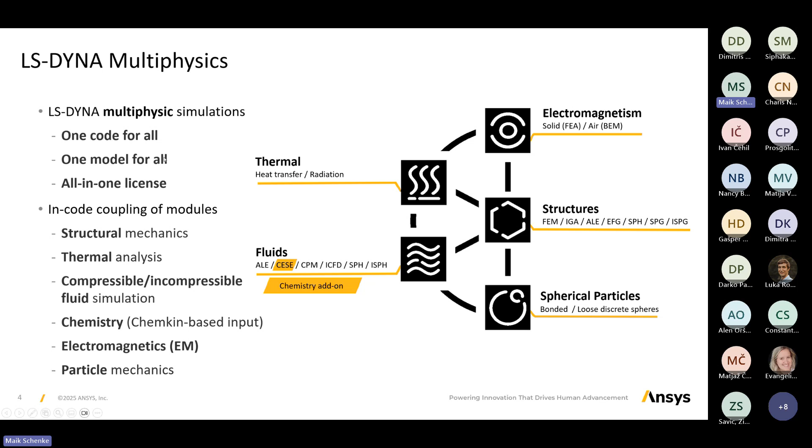Usually when you develop a new product, you have to consider a couple of load cases. For instance, take this ball pen as an idea: you have to think about the operating conditions. You activate the pen, deactivate the pen, do it 1,000 times, and then simulate this to get an idea if your design actually works and how good the reliability is.

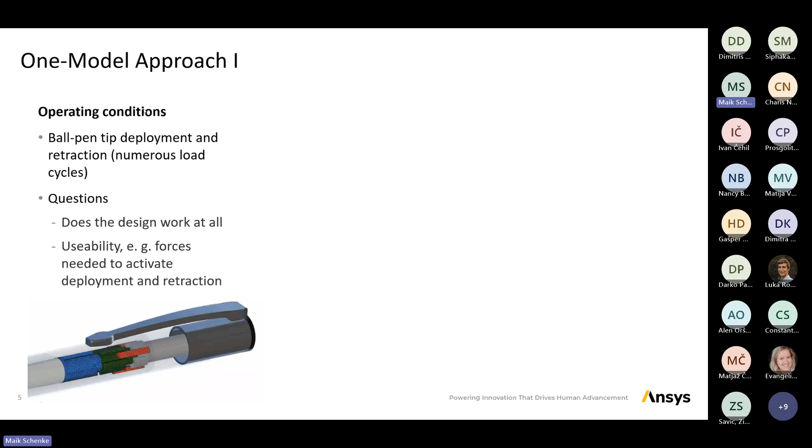But apart from these operating conditions, you also have different load cases, usually called misuse load cases. For instance, with a pen, some people get angry and try to release the pressure on it, so they start to bend it — that's a misuse load case. Or another one: people get angry in a different way and just throw the pen against the wall. That's the second load case.

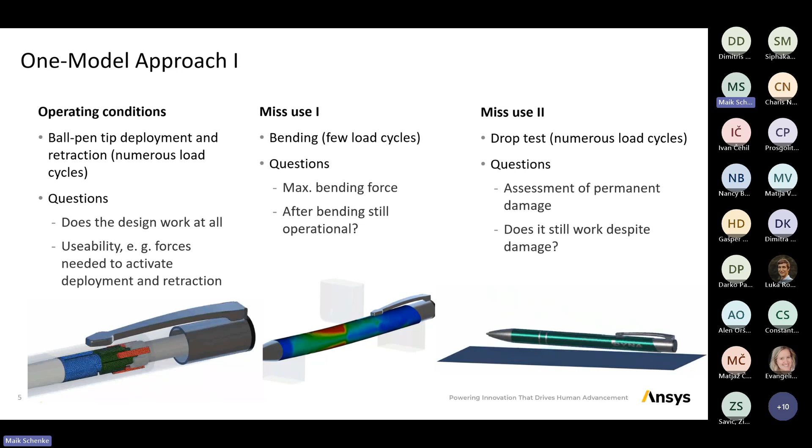What you need to do when you design an object is consider all these different loading conditions. The problem is, depending on the scenario you want to simulate, you have to rely on different methods. For instance, this one here could be an implicit load case, so it's something slow and static. The drop test, though, is something more fast, quick, and impact-like. But you have to bring it all together, and what people usually do is start with their geometry.

You create a simulation model, define your operation loading condition, then take the CAD geometry. Maybe you can reuse some of the meshes, but most of the time you have to convert it again to match your software, then run it with a different software, and so on. So for one product, you often have to incorporate different software tools to simulate different loading scenarios.

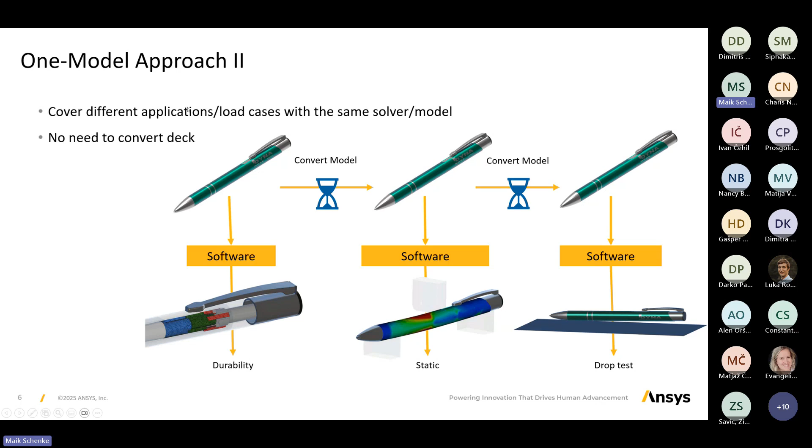So what is the one model strategy? Basically, you do everything, in this case, with LS-DYNA. For instance, you can run explicit and implicit models in the same solver, so there's nothing you need to switch. There's a switch in LS-DYNA you have to activate, and then you can run an implicit simulation with a model which originally comes from an explicit design, or vice versa.

I want to be honest here. Some features have to be remodeled, but basically you're saving a lot of time because you do not start from scratch all the time. You can save a lot of time because the element types, loading conditions, everything is reused, and you're saving a lot of time by doing this.

And then, of course, you can also think about putting this into a multiphysics simulation. Again, you're staying inside of the same code, which actually helps you save a lot of time.

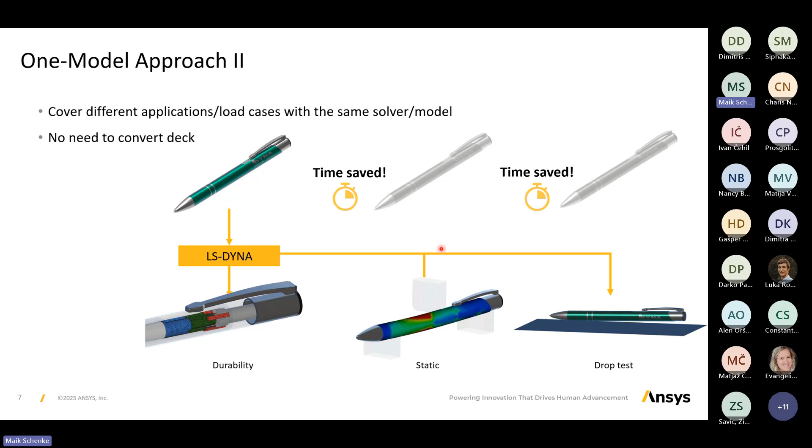This is the idea, because I want to get this straight, as a lot of people didn't know what was meant by this one model approach. When you come across this term, one model approach is the idea of doing everything in LS-DYNA, if possible. If you have crash scenarios, most people do their crash modeling and then also investigate whether they can do implicit or quasi-static load cases as well. If this is possible, they're saving a lot of time.

Let's jump into the first section, which is vehicle design. Here I'm going to focus on land combat vehicles. When you think about these vehicles, this is just a generic military design. You have, again, different loading scenarios to consider.

For instance, there's this mine blast. You have to think about what happens to your structure if you expose it to a shock wave or a particle blast.

Then, of course, you need to think about NVH, about rough driving. Then there's the impact onto the structure, in terms of how that impact affects your passengers inside. This is also something to consider.

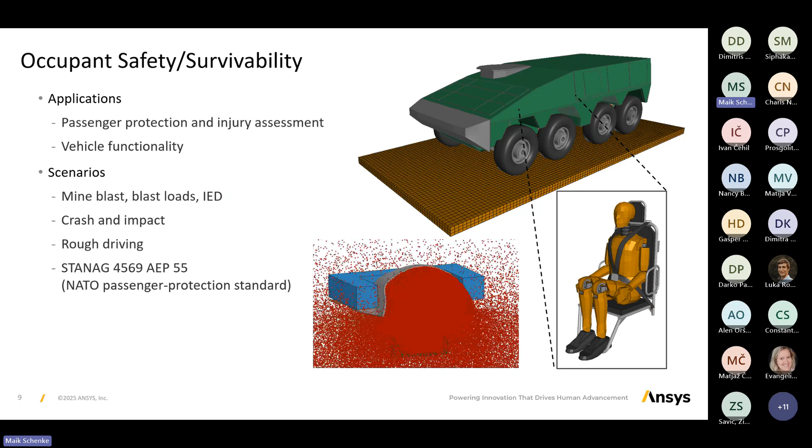And then, of course, you have to consider all kinds of NATO protocols for safety standards and so on. What I want to say is there are so many different types of loading conditions and scenarios you have to consider and bring together into one product, and in the best case you can do this in one software, which saves you a lot of time. But this is the best case scenario, and of course there's still some modeling you cannot do with LS-DYNA. Still, before you switch to a different code, ask: can this be done in LS-DYNA as well?

So let's talk about blast modeling. This is one of the load cases when you think about vehicles. There are several methods available: you can use ALE, you can use CPM, or you can also use the dual CESE method if you want. The idea in any case is you have a source of a pressure wave, and it's affecting the structure. If the pressure wave is strong enough, it can even lift heavily armored military vehicles. There are different ways of doing this.

For instance, here this is just the ALE method, which is one way of doing it. You can also use the CPM method together with particle methods, in order to enhance the blast acting onto the structure. That's one way of doing this.

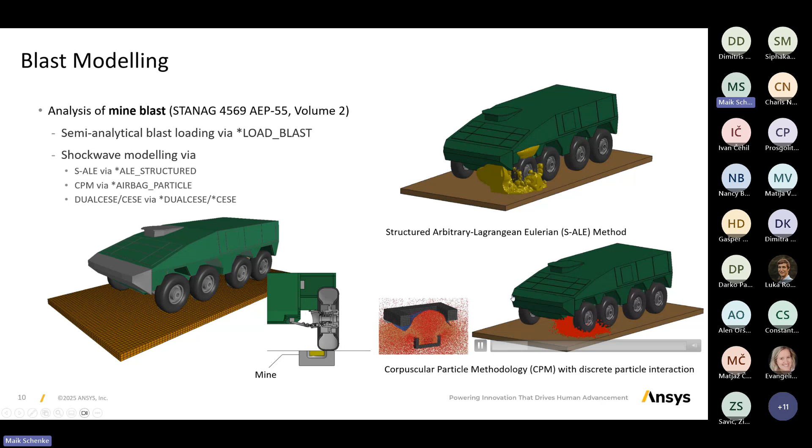The next step is to look inside of the model to see what the blast is actually doing to the car. You can also check for penetration.

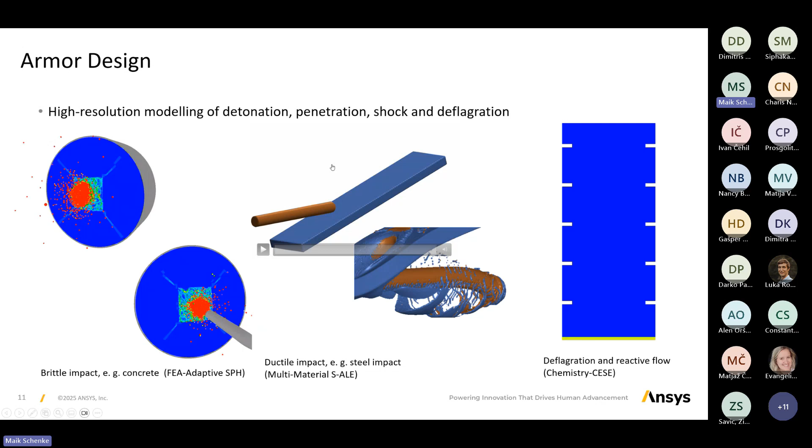Another one would be the ductile impact. This is the classic scenario where you have high velocities, and even though it looks like liquids, these are of course not liquids. These are solid materials, but just because of the high impact you have these large deformations, making the solids look more like liquid-like materials. Here, this is done with the ALE method.

Then we also have something we call the CESE method, which is actually flow mechanics for high velocity flows. So for instance, pressure waves, hypervelocity impacts, hypervelocity flow, like in engines, rockets, and these kinds of things.

We even have this reactive flow. This is a simulation my colleagues did a while ago, showing the burning process inside of a tank. They wanted to understand the pressure distribution, the propagation, and also wave reflections.

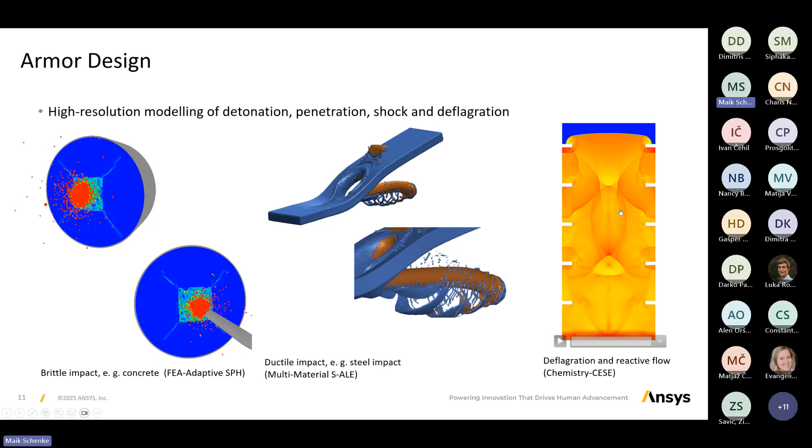So to sum this up: here we have our design with brittle fracture, which you can handle with FEA and SPH. You can do ductile impacts, where I think the S-ALE method is the way to go, or if you have hypervelocity fluid flow, and this can also interact with a structure. You can place a tank in this scenario or some flexible structure, and it's always interacting with the fluid flow.

Next up, we go into the vehicle, which is then occupant safety. I'm not sure if you heard about it, but maybe a year or two ago we released this new high fidelity human body model, developed from Dynamore, and now part of Ansys. The idea was to go all in with the details of human anatomy, making no compromises, and including as much detail as possible.

For instance, we took all the muscles and did not simplify them in any way. You won't find any line elements representing muscles, ligaments, or tendons. It's all modeled as solid elements or at least shell elements, to have the most high fidelity human body model and keep it as general as possible, so we don't restrict further applications with early simplifications.

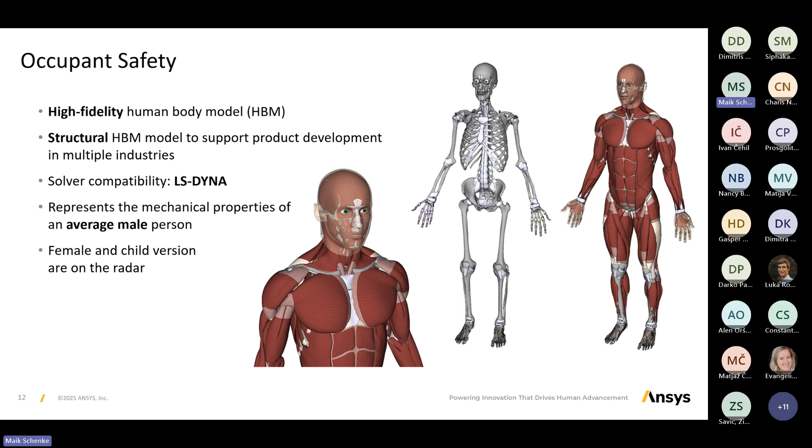And this is the outcome, the HANS model. Currently it's heavily focused on automotive industry, but we're already investigating applications for military use. For instance, here you can see the first tests with a blunt impact at 35 kilometers per hour, which is the typical scenario for automotive.

Also here, a belt tension scenario. But you can also think about military applications — for instance, if you have a protective vest, a bulletproof vest, the vest distributes the impact load of the small projectile onto a bigger surface. In the end, what the body experiences is more like a blunt impact.

Another one here, this classic automotive impact with a head impact. We want to know the chances of a concussion if we have a head impact, and how the brain fluid distributes the load onto the brain, affecting that chance of concussion.

Also here, this is an impact scenario more related to military applications — a helmet on a pilot during emergency ejection, and how this affects the spine and muscles. Is there a chance we can redesign the seat to keep people as upright as possible, to avoid this whiplash behavior in the neck area? These are questions we want to answer.

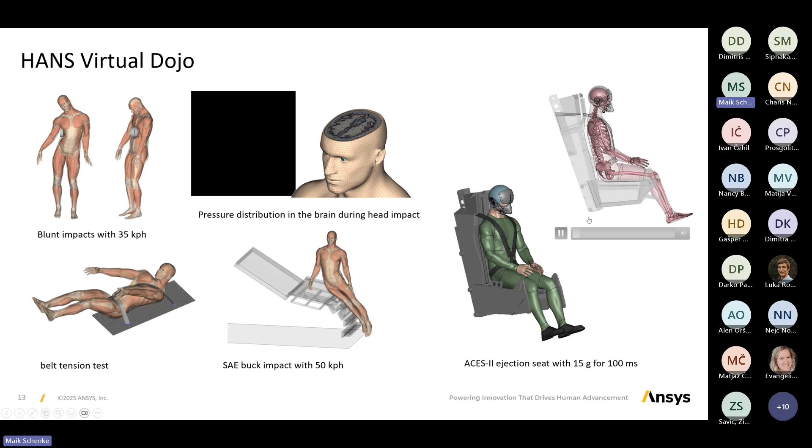Automotive is the more established part, but now we're roaming into new application scenarios, and in this case we're also looking into military applications.

Okay, next up is weapon design. Here too, you have to deal with different kinds of phenomena.

If you do non-linear structure analysis, focusing on the structure with impact, then probably LS-DYNA is the way to go. If you have something more fluid dominated, then Ansys Fluent is the more powerful fluid solver.

However, when you come to component level dynamics, with rigid body motions and similar, then Ansys Motion is the way to go. And the last case is when you want to combine it.

Then you can think about LS-DYNA either as one code, since you have coupled fluid structure interaction already built in, or you think you just need a weak coupling and a more powerful fluid solver, then you go with Ansys Fluent and use the intrinsic coupling possibilities.

So it highly depends on what you want to do, but there's no general recommendation we can give here. It just depends on the very particular case.

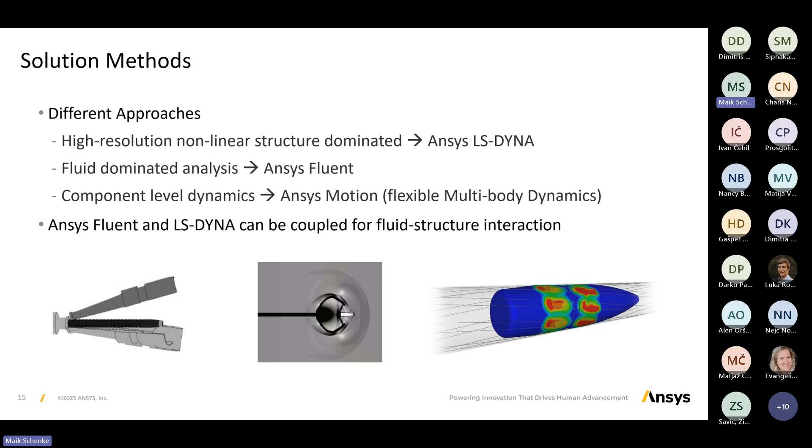Okay, so one example is the in-bore analysis of the bullet inside of the machine gun. The question we want to answer, first of all, is what is the stress exerted onto the whole inner diameter?

We want to know what's the effect of the friction. We want to know what's the heat generation. So it means basically addressing the topic: how many bullets can you shoot through this rifle

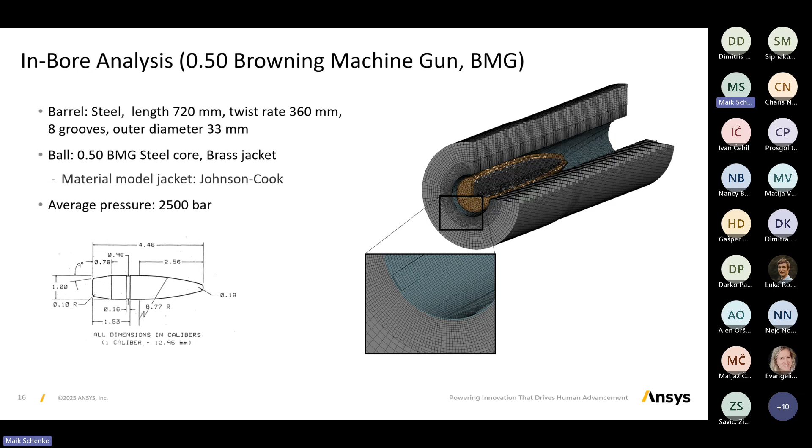till it gets too hot or too warm. And then it's becoming inaccurate because of the heating. You have a thermal deformation. So that's the idea of this one.

And this was done fully in LS-DYNA. So you have the bullet, it's starting to spin. You can see here we have plastic deformations on the bullet, which also affects creating the friction area, and then the friction area generates heat, and this heats up the rifle shaft in this situation. These are the answers we want.

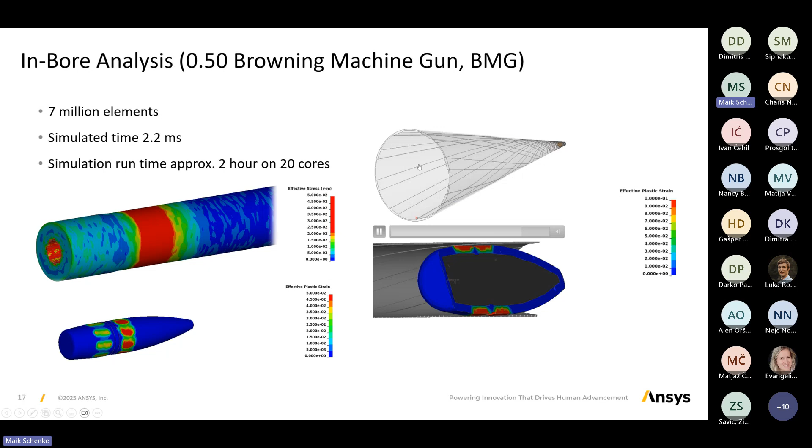Also, like I said, this is a fully dynamic coupled thermal analysis. If you wish, you could also add fluid flow around this one, or maybe also on the inside, to accelerate the bullet by some explosion or reaction, and have the full model and simulation.

Okay, then there's the other one here. Once you have accelerated the bullet, at some point it will leave, it will be released, and then of course you want to know what are the shock waves propagating,

especially if you think about big tanks. As soon as the bullet is leaving it, you also give way for the pressure wave to roam into the free area, and then you want to know how far away people have to stay from the bullet or from the tank in order to be safe. Otherwise, they get hit by the shock waves.

Or you can also investigate how to redesign this part of the cannon in order to avoid or disperse these shock waves into the environment, to have less impact. You can do this with either the S-ALE method in LS-DYNA, or the CESE method, to perform a fully structured, fully coupled fluid structure interaction simulation, also coupled with thermal effects.

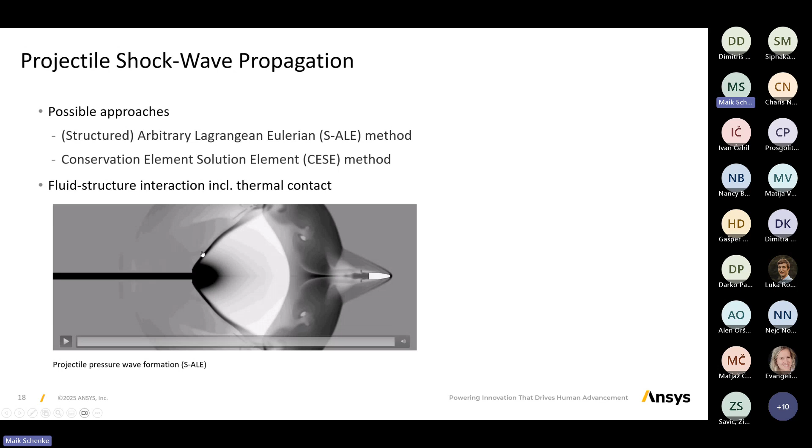Another one is so-called shape charges. Basically, a shape charge is a weapon design which starts automatically, generating the projectile when you fire the weapon.

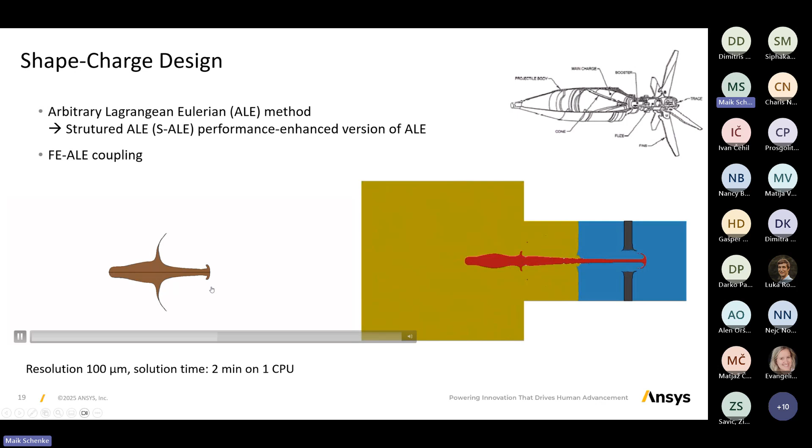So for instance, this is an explosive, this is some kind of container, and this is usually some copper-like material, and you ignite it. Then you want to design your structure to be stiff enough, and you also want to know how this projectile is shaped, and then once the projectile is shaped, you want to know how it impacts your actual target.

So you're going all in. You have to create the ignition process with the generation of your shape charge, the projectile when it's built, it's going to set up, and then when it's hitting your target.

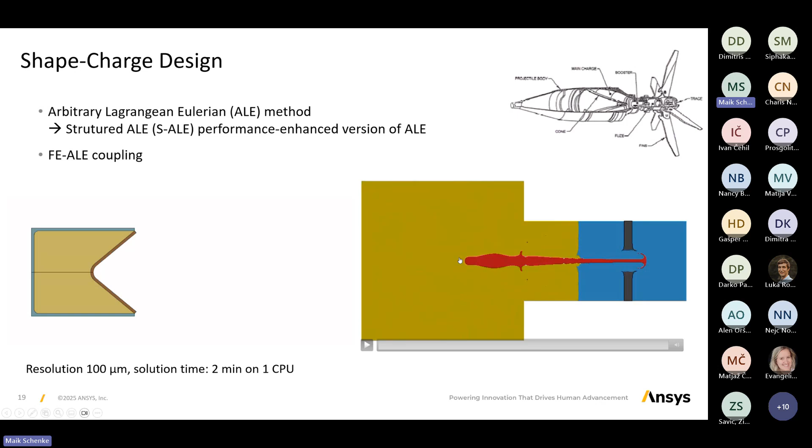This is, by the way, I think an ALE method in this case. And last but not least, one of the very often questions we get, or the questions you often have, is how robust is my design?

If you've designed a certain machinery, or maybe a bullet or whatever, and you talk to your supplier for the materials to produce it, it turns out the quality of the material you're getting is not perfectly fine, not as expected. So you want to know how these deviations or scattering of material data alter the performance of your product. For instance, if the sheet metal is not 2 millimeters, but maybe 2.1 or 1.9 millimeters, how does it affect the performance of your product? What you have to do is a so-called robustness analysis, or sensitivity analysis.

You take your simulation model, modify these parameters, and run the simulation again. Depending on the number of variations possible, if you do this all by hand, there's a lot of simulation work to do. Each simulation has to be set up by an engineer, you run it, evaluate the results, and put it all back together. There are simple ways to automate this simulation workflow for robustness analysis. You can do this with LS-OPT, OptiSLang, or maybe PyDyna, but LS-OPT and OptiSLang are the ones designed for it.

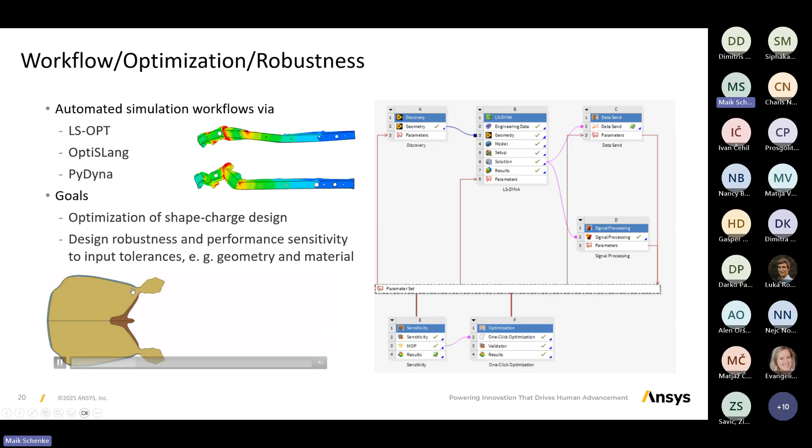That of course becomes more important when it comes to more complex designs, also shape charges - the thickness of this container, how it affects the formation of your projectile, and so on. This is making your life a little bit more simple.

This was a quick rush through, and the take-home message is, first of all, LS-DYNA is more than automotive crash nowadays. I want you to keep in mind that if you think about LS-DYNA, think about this strongly coupled multi-physics solver, this all-in-one approach, this one model strategy. If you have an LS-DYNA license, you can use all these different add-ons - electromagnetics, fluid mechanics, particle mechanics - all right away, coupled with structural mechanics.

To make your life easier as an engineer, the integration into other Ansys products becomes more and more developed. There's heavy development in the Ansys workbench, the mechanical integration, to also support LS-DYNA simulations. Every year there's a lot of development to support all the methods in LS-DYNA through this mechanical interface. So if you're a mechanical engineer, you can reuse your own knowledge and easily run LS-DYNA simulations - at least the basic ones, you'll need a bit more when it comes to multi-physics - but you can reuse your mechanical know-how as a starting point and grow into a more holistic simulation engineer.

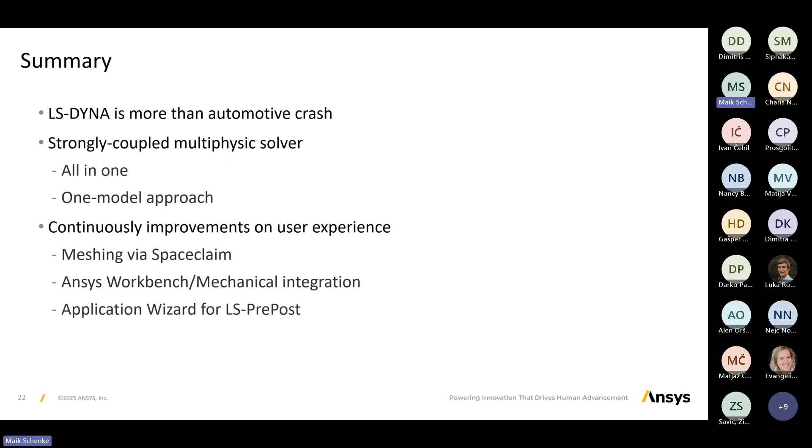So basically, this is the take-home message. With that, thanks for your attention.